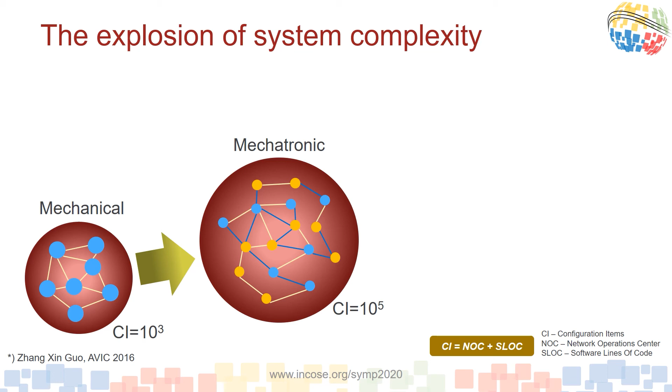The reason we are talking about this is an incredible explosion in complexity of things that we design. Way back, most of the products were simpler. The focus was typically on a single domain as a design silo, mechanical CAD and electronic schematic, software code. Then, somewhere along the line, we introduced the next level of complexity because now we had to worry about the interactions between mechanical, electronic, software, although in a rather straightforward way. And typically, no more than two domains were intersecting at a time. Mechatronic became a big word.

Today, we worry about systems in the true sense of the word. The system of interest interacting with other systems of interest, and all in the context of the overall system of systems. Autonomous vehicles being a case in point. System context plays a huge role in the rise of complexity. Things talking to each other over networks, over-the-air software updates, information-driven maintenance, and it is only accelerating.

With the initial levels of complexity, the focus was primarily on the product. PDM, PLM systems manage products' bill of materials, BOM, with little understanding of the design intent, variability, multidisciplinary dependency, or even traceability to the requirements. With the digital transformation, we tried to change that. But simply moving the current tools, silos, and best practices into the digital world without changing the overall context is not going to suffice. To begin this journey of digital transformation, companies are moving their focus from products to systems and to system of systems.

The product itself is a system expressed as a multiplicity of interrelated abstractions and domains that all interact together. Your reality, however, consists of many other related systems that must be considered together. For example, the system context, manufacturing systems, maintenance systems, and so on. That system of systems interaction is a major contributor to the overall complexity. This entire set of systems needs to be analyzed as a system of systems because they all interact.

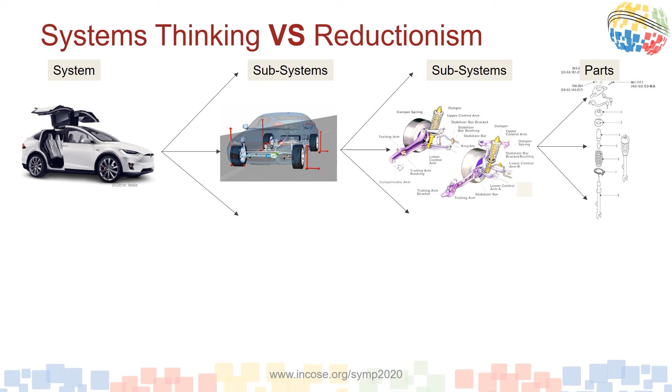Systems engineers do a lot of systems thinking that fails to float down. While responsibilities and tasks do float down, requirements and a deep understanding of the system behavior do not. We put blinders on the engineers working on the subcomponents of the system. So what's lost with singular focus on reductionism? A true understanding of the overall system, dealing with system trade-offs, understanding and leveraging emergent system behaviors and properties, optimizing the overall system, and so much more.

Let me be clear. I'm not saying that systems thinking is a replacement for reductionist design practices. These are complementary approaches that should be applied simultaneously and continuously when designing and analyzing a complex system. These approaches can be used at any level of the system design and in any domain. We believe that systems thinking and reductionism are completely complementary approaches.

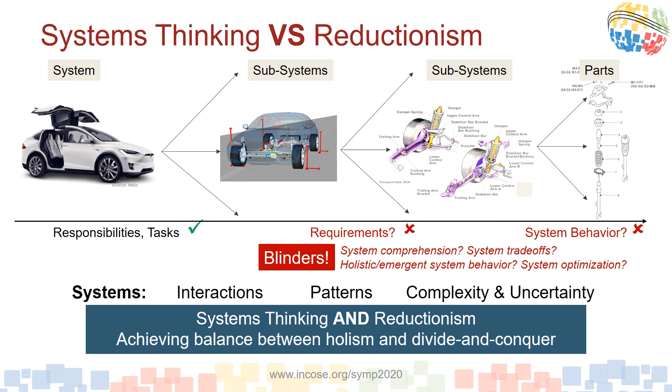As I already mentioned, a balanced approach requires a PLM platform capable of managing the entire system lifecycle from concept to disposal, a digital thread that reflects your realities. The agility of the system development process depends on the ability to continuously and rapidly answer the question, how good is my system design? This process is agile and iterative and can start at any level of completeness of the design and at any juncture of the engineering V-curve.

The explore and validate process is heavily reliant on simulation. This requires the right tools, proper level of automation, access to the right set of design data at any level of system abstraction and at any intersection of the subsystems. And of course, an ability to retain a system of record: what was done, when, by whom, with what tools, with what data, with what results.

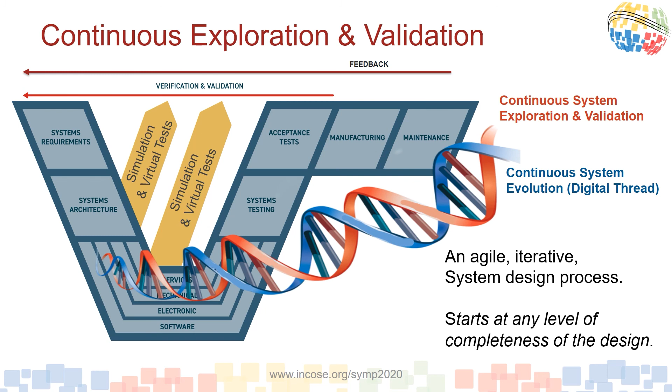This cannot be achieved when simulation is a silo and when the design data is not easily traceable. In other words, this can't be achieved without simulation being part of the digital thread. This also requires validated simulation models that are automated, highlighting the need for good simulation governance practices across the enterprise. Keep in mind that you can always be agile, but you need to be moving forward, not sideways or backwards. To rapidly and incrementally move design forward, the team needs the right platform and tools for continuous design exploration and validation.

Assuming system architecture, part of the MBSE representation, is at the core of your design, you need a PLM platform to capture the related data and metadata for traceability via a digital thread. This is important because system architecture is the connective tissue for all other system representations and implementation details. This PLM platform must support configuration management and variant management throughout the lifecycle, a lifecycle that starts with the basic concepts of what the system is supposed to do and extends all the way to system disposal. The PLM platform must also be open, extendable, and easily customizable, as no digital threads are alike. Your digital thread must reflect unique particulars of your enterprise, and it will continue to change and evolve over time.

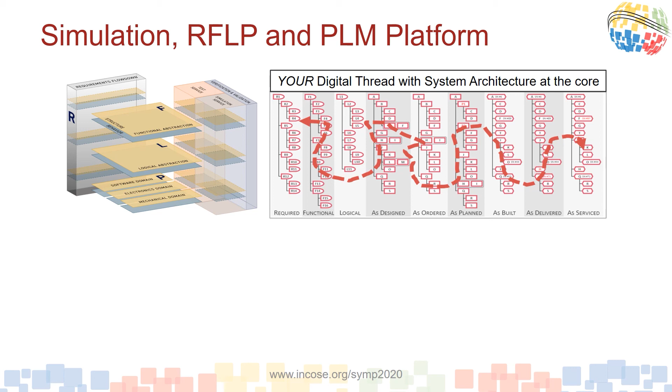This highlights the need to go beyond the traditional product-centric PDM-PLM systems towards PLM platforms. Unlike PDM-PLM systems, PLM platforms capture and reuse both the content and the intent of system design. Exploratory greenfield simulation is a good example of the design intent that is often external to the PLM and therefore not included in the digital thread. On-demand, pervasive simulation management supports continuous system exploration and validation, a process required to identify, investigate, and mitigate emergent system properties and behaviors.

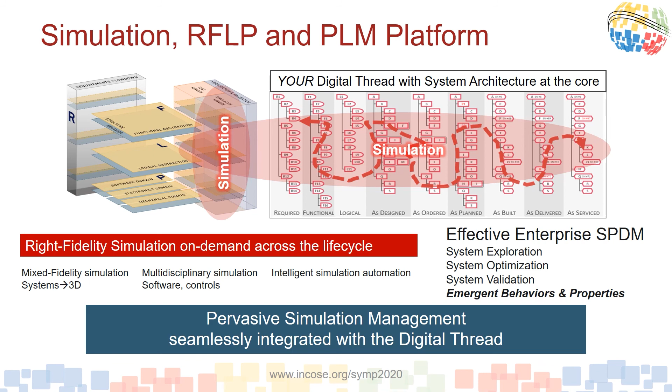I just mentioned that system architecture is the connective tissue for the entire system, and therefore it needs to be represented in a digital thread. But what does that mean? System modeling tools used by system engineers, for example Cameo or Rhapsody, generate highly complex data structures. These tools operate on details that go way beyond what the digital thread needs and use data models that are not compatible with each other, tool to tool. And yet, the digital thread needs to capture some of that data from a multiplicity of MBSE tools in a tool-agnostic form.

The most reasonable solution is to define which system architecture elements authored in these models are key to defining your digital thread, and then focus on synchronization or federation of only those elements between the authoring tools and the digital thread. We call these elements anchor items. The benefits are clear. There is a single system architecture for all, the connective tissue, and the digital thread remains tool agnostic and extendable into the future. The mapping between various MBSE tools, high granular views, to a single digital thread, low granular view, is the Rosetta Stone of the digital thread.

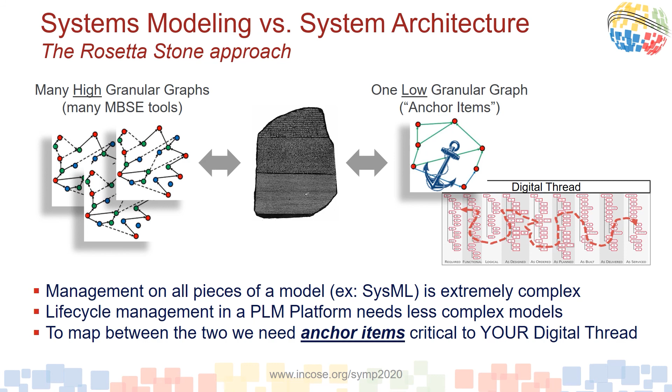Notice that in that digital thread definition, we include what happens to the assets in the field after they are manufactured. Very important. For example, one of our automotive customers is currently building two partial digital threads in two divisions for two purposes. Model-based development is doing engineering data management, while a different group is doing vehicle performance management that involves simulation. These digital thread segments are still disconnected, but both use the same exact tool-agnostic system architecture model. In that sense, they are joined at the hip through that common representation of the system architecture, even if they are not yet used together. Regardless of where or how many of the partial digital threads are created, it is critical to view the system architecture as the core foundational data structure on which to hang the rest of the data.

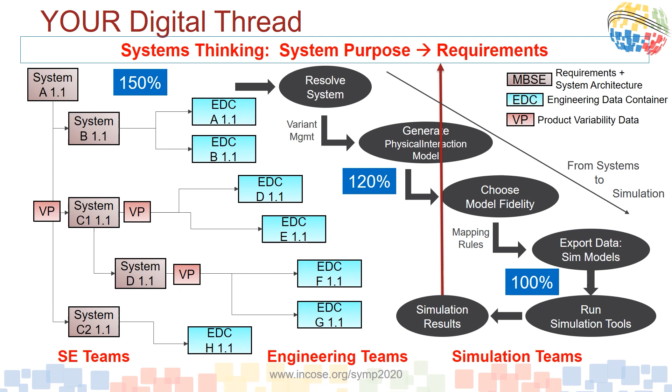Let's see what this looks like in the software. The diagram shows flow of the demo, although some steps were cut out in the interest of time. The demo is presented and narrated by Malcolm Panthaki, Aras Vice President, Analysis Solutions. Let's see it.

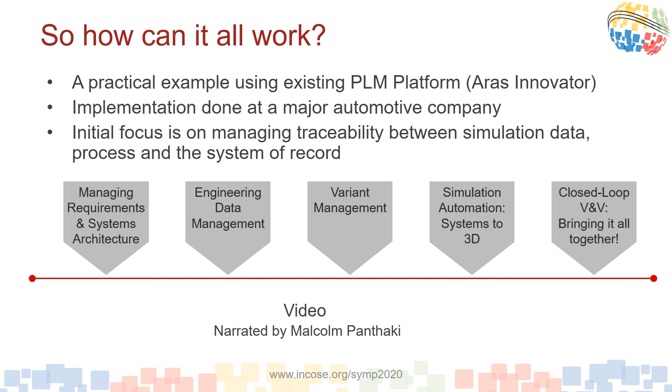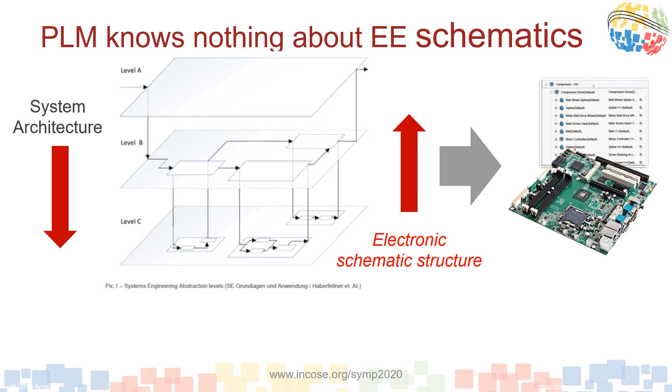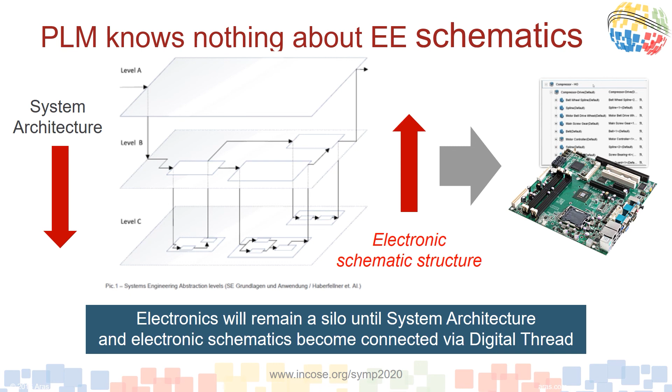For example, timing budgets established in the system requirements could be simulated, verified, or optimized within the schematic via traceability between system architecture and the electronic schematic, taking a holistic view of the system. But for now, that is not possible because vendors are not enabling it, while users are still focused on the more fundamental aspects of a digital thread. Electronic design remains in its own silo and therefore cannot be included in a digital thread from the systems thinking perspective.

A similar situation exists with embedded software. Just like electronics data, ALM data is a silo that remains disconnected from the PLM platform and the overall system digital thread. I'm mentioning this since software is such a critical part of a system, obviously, a role that is only destined to grow exponentially.

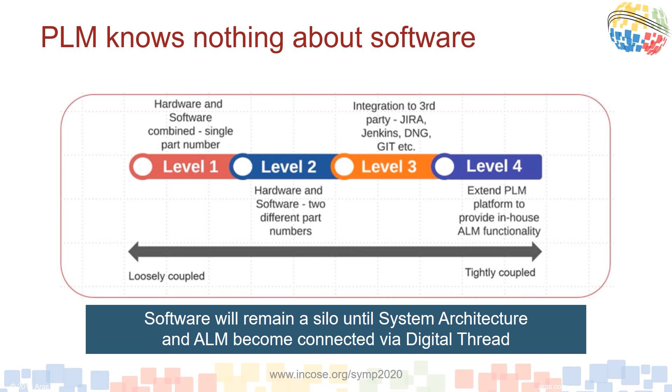In the end, it's you who needs to justify your use case of investing in incorporation of system model and simulation in PLM platform based on your digital transformation needs. You then need to define just what this means to you, which sections of the digital thread, what anchor items, etc. You need to make simulation a fundamental part of this process, not just from the simulation perspective, but more importantly, from the systems thinking perspective.

And finally, silos are your enemy, especially silos defined by the specifics of the authoring tools and data models used by these tools.